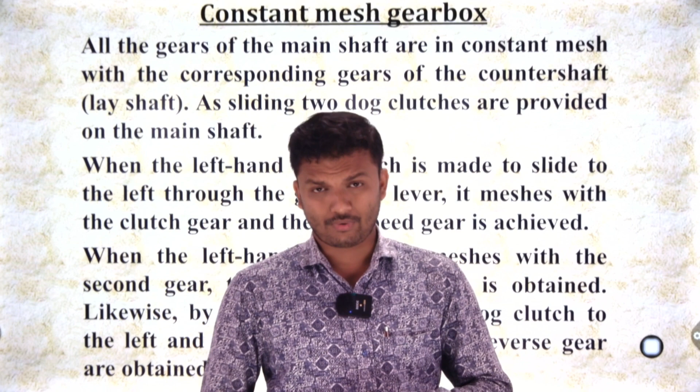Continuing the gearbox system in transmission, the second part of it is gearbox. In the previous class, I already discussed the types of gearbox. The first type of gearbox is sliding mesh gearbox. Today we are going to discuss the constant mesh gearbox.

The constant mesh gearbox means what the name suggests, constant. Previously we studied about sliding, where the gears just slide over each other. They get locked, counter shaft to transmission shaft, and for that purpose torque is transmitted and controlled. But here the word constant means there is no change in the locking of the gear. They are already fixed over each other.

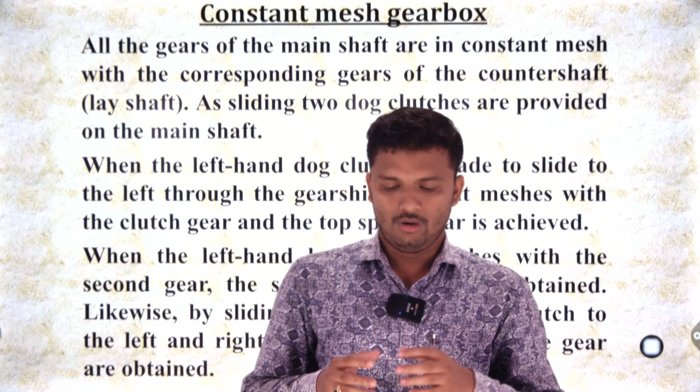All the gears of the main shaft are constant in mesh, as I already discussed, with the corresponding gears of the counter shaft, also known as lay shaft. The transmission main shaft, or the counter shaft, is otherwise known as the lay shaft.

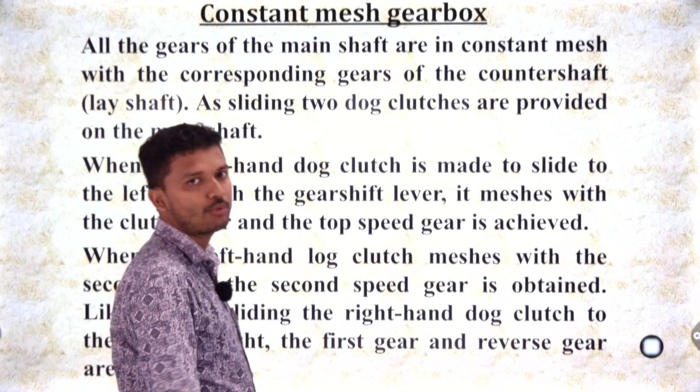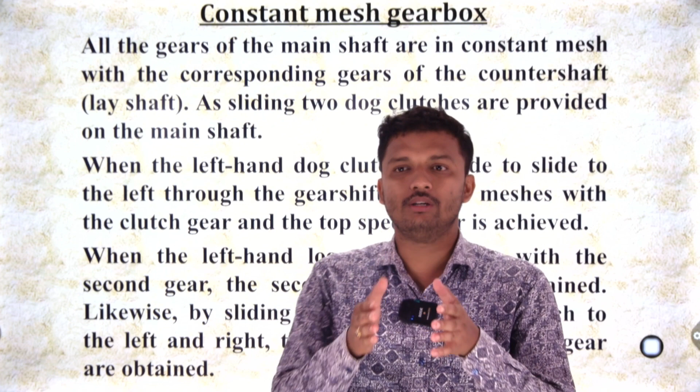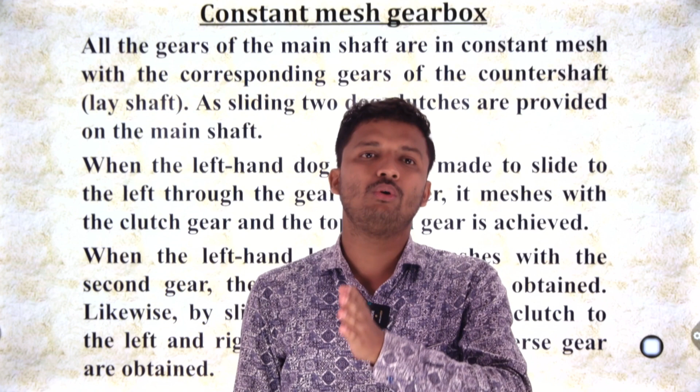As in sliding, two dog clutches are provided on the main shaft. This is a very important term, and the difference between this constant mesh gearbox and the sliding mesh gearbox is that there are two sliding dog clutches. There is an arrangement between the gears known as dog clutches. They slide and connect with the gear arrangement, and accordingly the torque is transmitted. The gear itself doesn't slide over each other, but the dog clutch slides on the transmission shaft, connecting accordingly so that we get the torque by means of the gear arrangement.

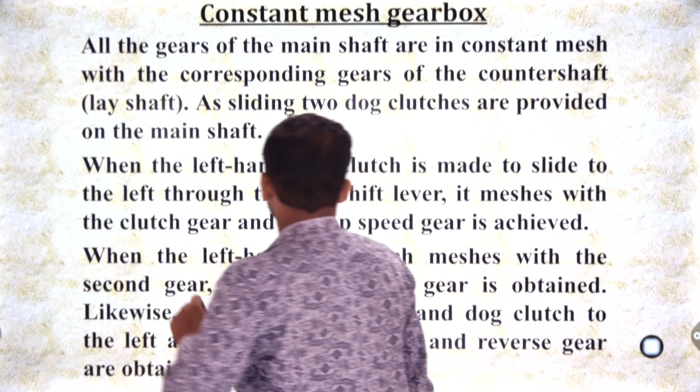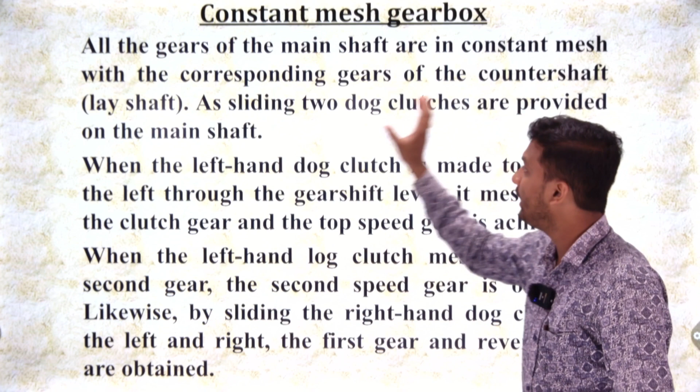As the two dog clutches slide over each other on the main shaft or transmission shaft, that's why it is known as sliding two dog clutches. They are provided on the main transmission shaft, not on the counter shaft or the lay shaft.

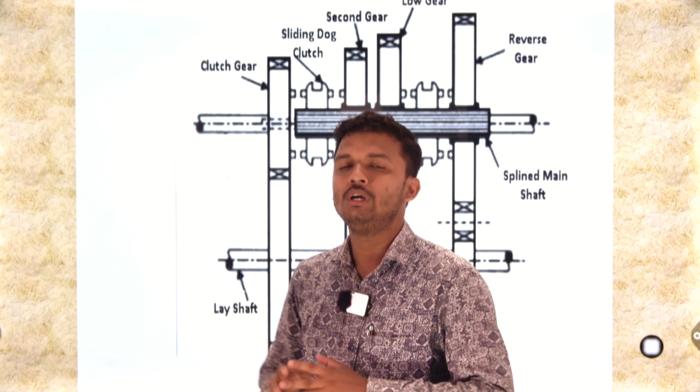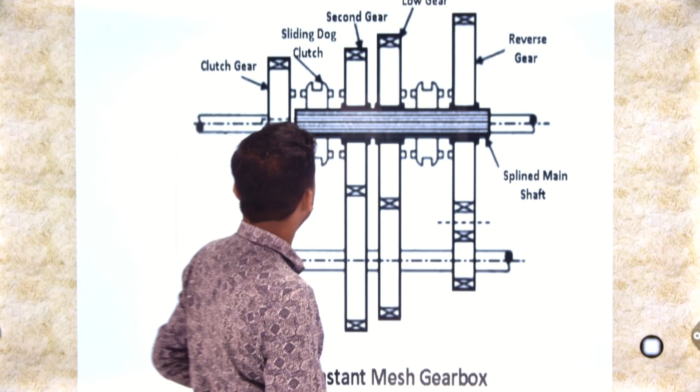So what's happened here is that when the left hand sliding dog clutch is made to slide to the left by means of the gear shift lever, suppose this is the right side and this is the left side, when the left sliding dog clutch slides towards the left side of the gearbox arrangement.

At that time it connects with the clutch gear, and the top speed gear is achieved. These four projection parts will be connected and locked with each other. Then the torque from the clutch shaft or input shaft or driving shaft is transmitted through this dog clutch because it is engaged, and the top speed gear is achieved. The torque is transmitted through the output clutch or output shaft or driven shaft.

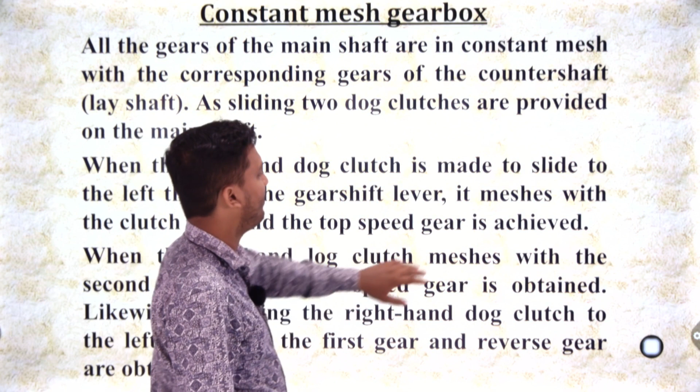Next, when the left hand dog clutch meshes with the second gear, the second speed gear is obtained. Here second gear is marked, this is the second gear arrangement. So when it moves to the right hand side, the left hand clutch gear moves to the right hand side and meshes with the second gear. In second gear, torque reduces and speed increases.

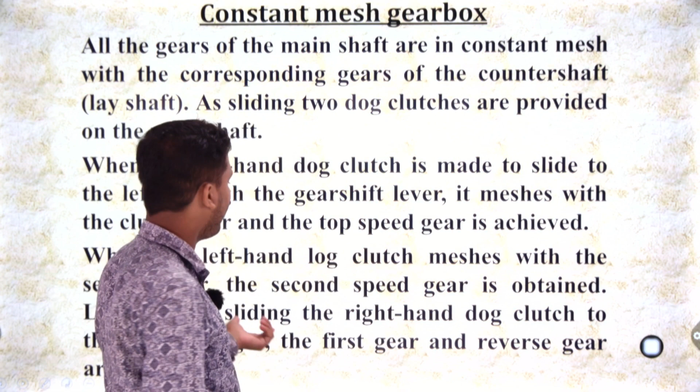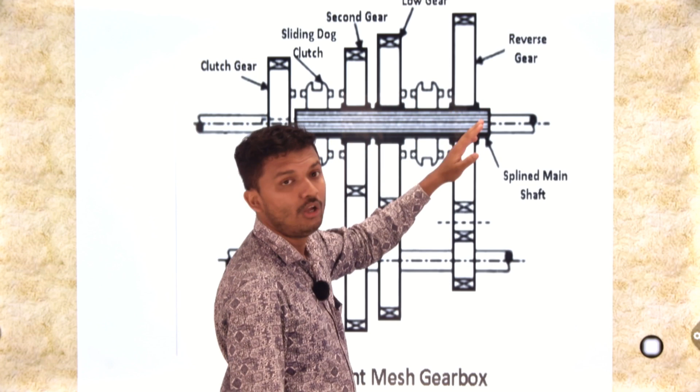Next, at last, likewise by sliding the right hand dog clutch to the left and right, the first gear and the reverse gear are obtained. So the function is similar to that of the left clutch. In the right dog clutch, if you move it towards the left, it engages or meshes with the first gear, or the low gear. Then if you move the right hand sliding dog clutch to the right hand side of the gearbox, it meshes with the reverse gear, and the reverse gear is obtained.

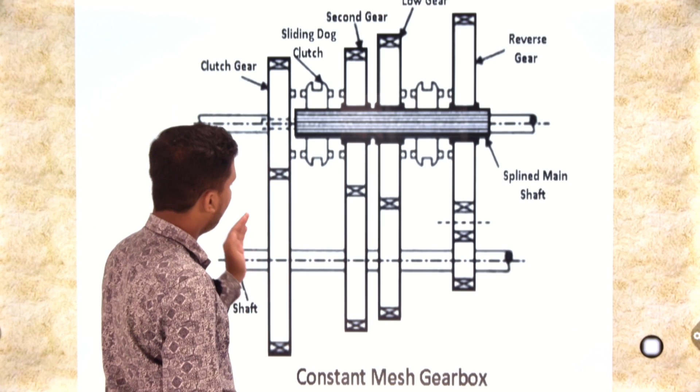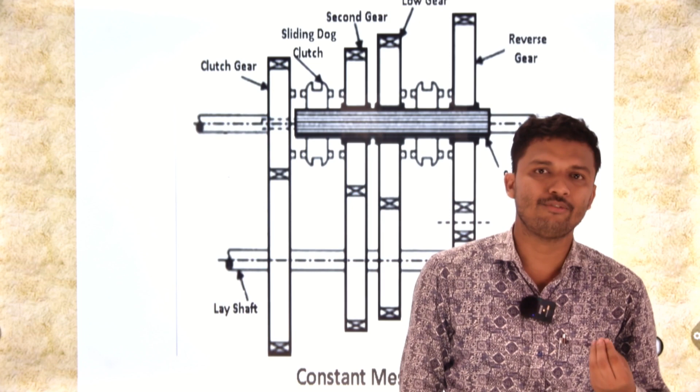So the overall function of this clutch and gear system is that, if you look at this diagram, every gear is already fixed in its own position, meaning they are constant. They do not slide over one another like in a sliding type gearbox. The reverse gear pinion is already fixed or locked, the low gear, that means the first gear, is already fixed, the second gear arrangement is already locked, and the clutch gear or top gear system and the lay shaft or transmission shaft are already fixed. So there is no sliding of any gears or pinions taking place.

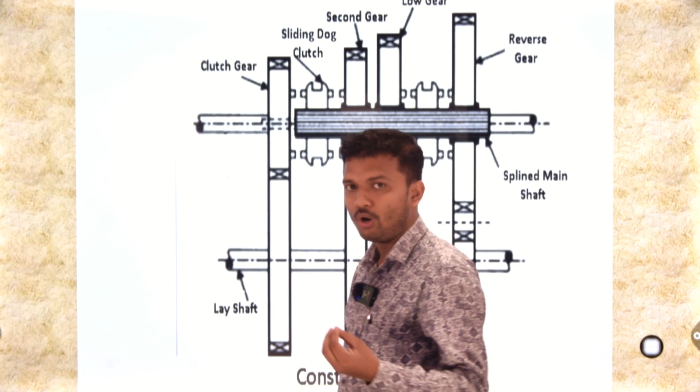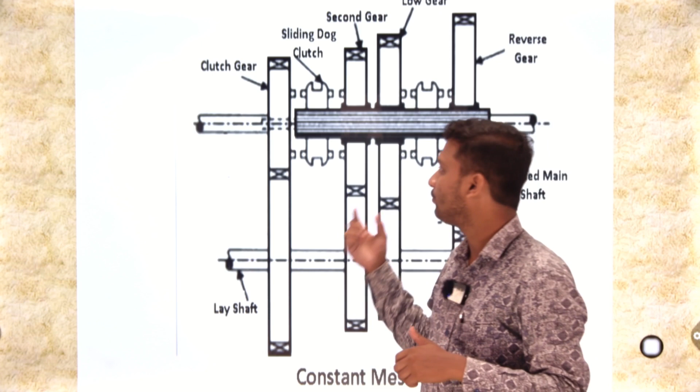So instead of the gears changing their position, dog clutches are introduced in this place. Here the top speed is 3, but in this type of constant mesh gearbox, the top speed can also be 4. Maximum it can get up to 4 speeds, the top speed being the 4th gear.

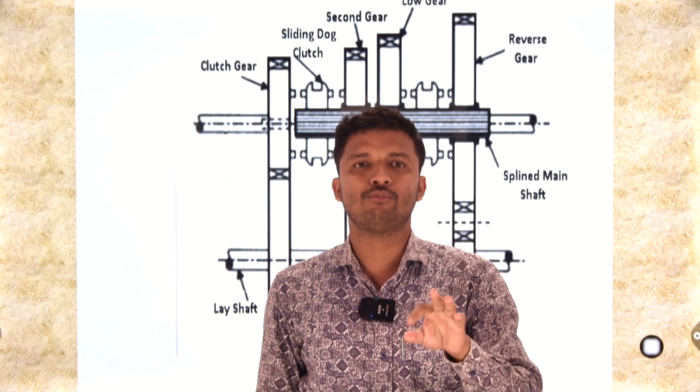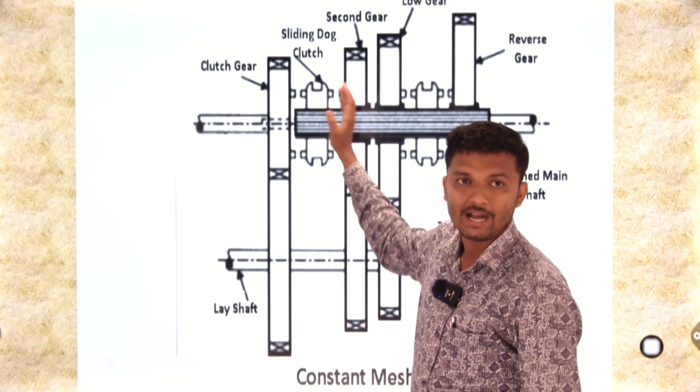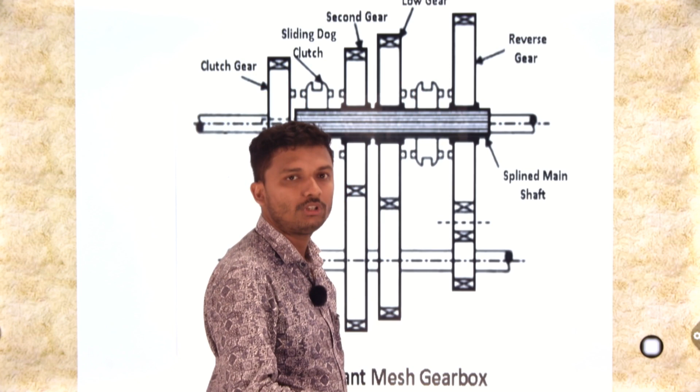Okay, what's happened over here? Again I explain the working principle. First you obtain the low gear, the first gear. For the first gear you just put the gear lever to first. At that time, the right hand side dog clutch will be moved to the left hand side and mesh with the low gear system. Mesh with the low gear system, and at that time the torque is transmitted to the low gear system into the driven shaft. Similarly, when you go for the second gear...

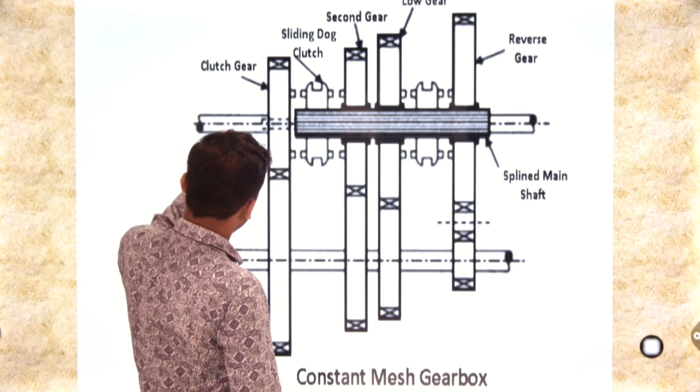When you put the second gear inside it, what happened? The second dog clutch at the left hand side moves to the right hand side, and the projection locks with each other. The second gear is obtained. When the second gear is obtained, the torque is transmitted through the second gear system from the clutch shaft.

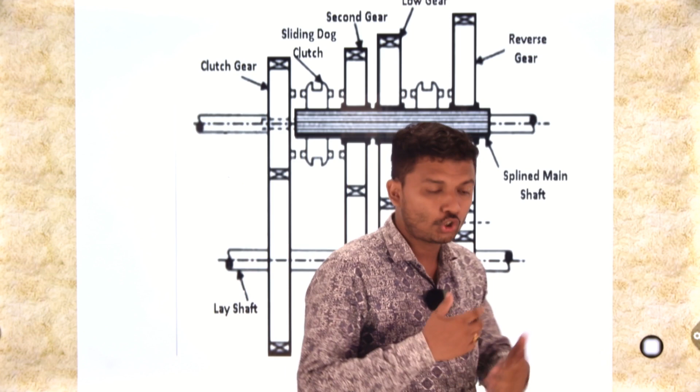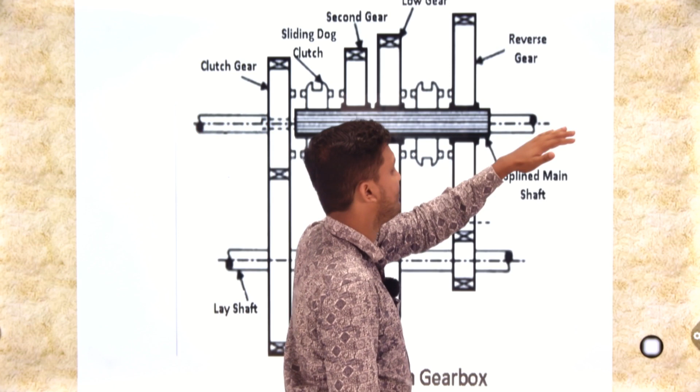Next, we are going to the topmost gear or the top gear. What happened at the top gear? The left hand side dog clutch is engaged or meshes directly to the clutch gear on the left hand side. So the complete torque from the clutch gear is transmitted to the transmission shaft, to the output, throughout the driving axles. So it is the top speed or third speed. In this diagram, the top speed is third gear.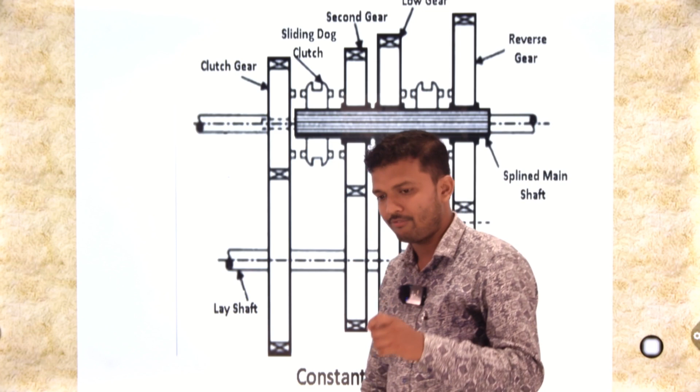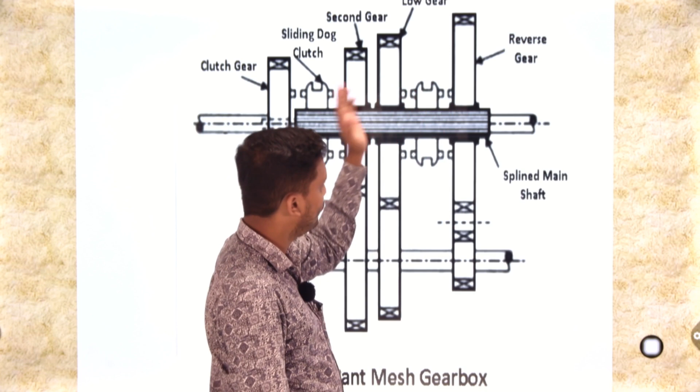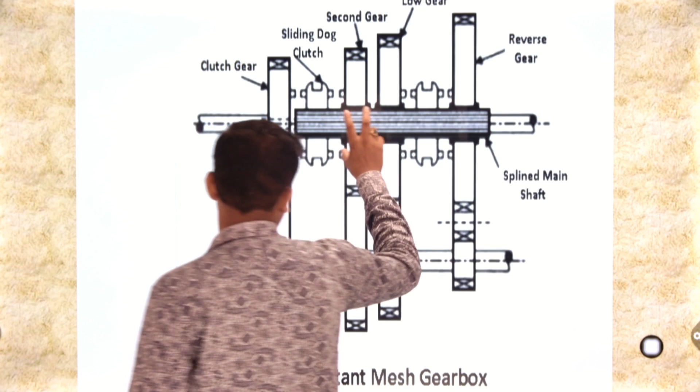Next, finally, the reverse gear. In this reverse gear system, what happened? The splined main shaft - in reverse gear system, if you put the reverse gear by means of a gear lever, the right hand dog clutch moves to the right hand side. When it moves to the right hand side, it gets locked or meshes with the reverse gear. The reverse gear is obtained, and the vehicle will move in the backward direction. So this is the complete working principle of a constant mesh gearbox. As the gear pinions are already locked, they never change their position. That's why it is named the constant mesh gearbox.

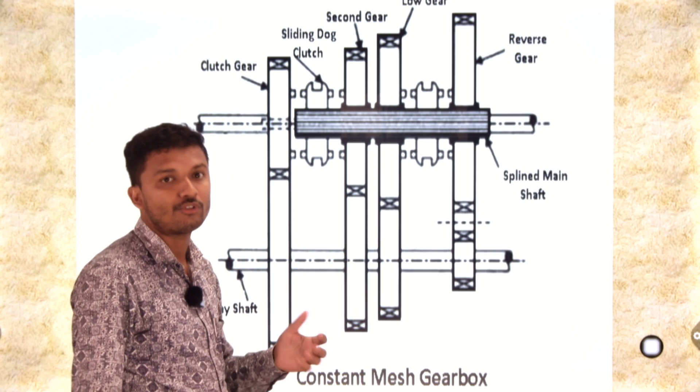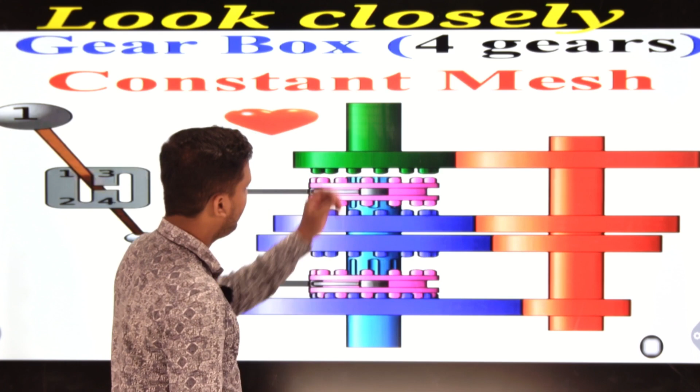So you can understand by means of this animated video. But over here there are 4 gears. Actually, if there is a reverse gear system, then another dog clutch will be here. Here, 1, 2, 3, 4 gears are there. The reverse gear is not able to be defined over here or projected in this video. If there is a reverse gear, then either this 4th gear will be reversed.

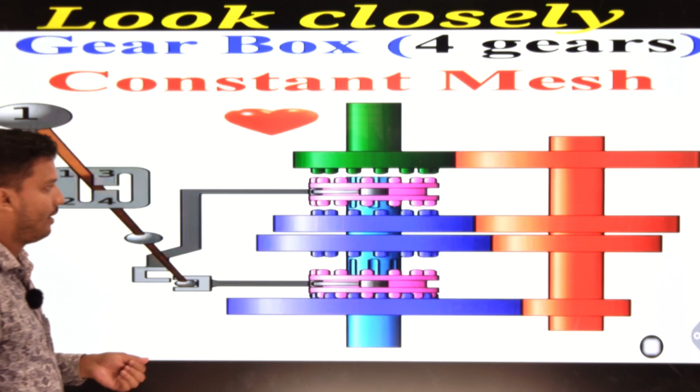So this is the second gear arrangement. The dog only moves, the gears are there in their own position. Third gear, and that is the reverse gear. So the dog clutch - the pink color - are the dog clutches which are moving, whereas the other gears are constant in their position, they are not moving. But in a sliding mesh gearbox, gears are moving with each other. Here, the pink color dog clutches are moving.

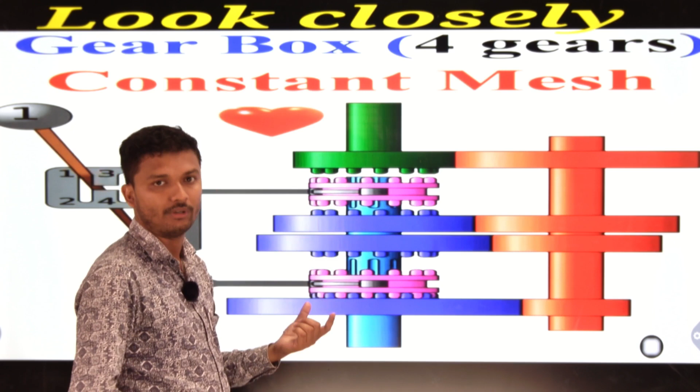Again, go for the video. First gear, this is the second gear. Then this one going to get third gear, and the fourth gear is the reverse gear. Okay.

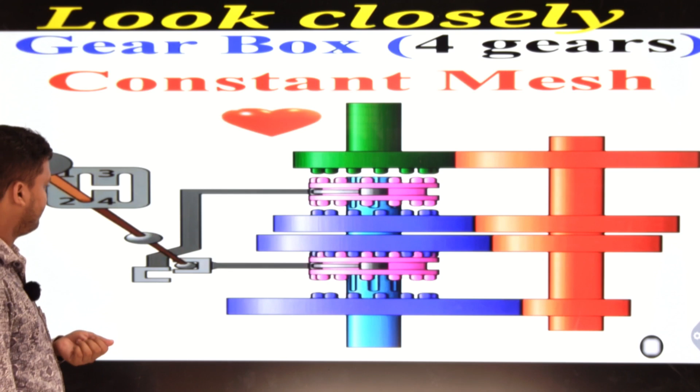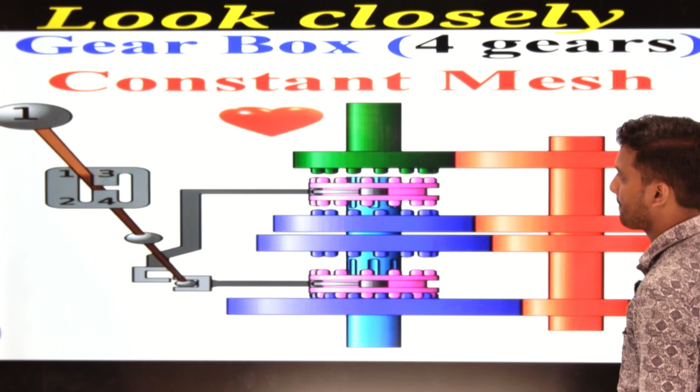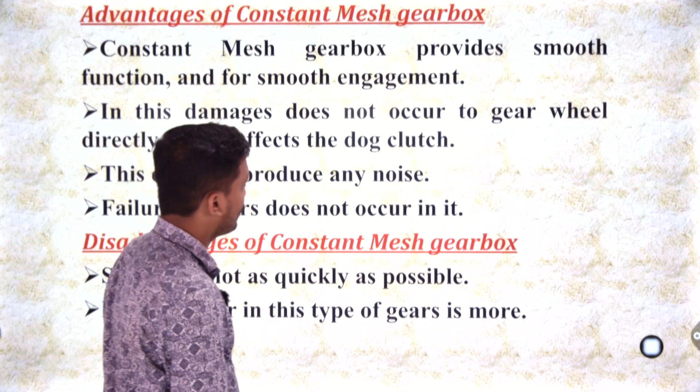What is the advantage of a constant mesh gearbox? The advantage of constant mesh gearbox is that it provides smooth function and smooth engagement.

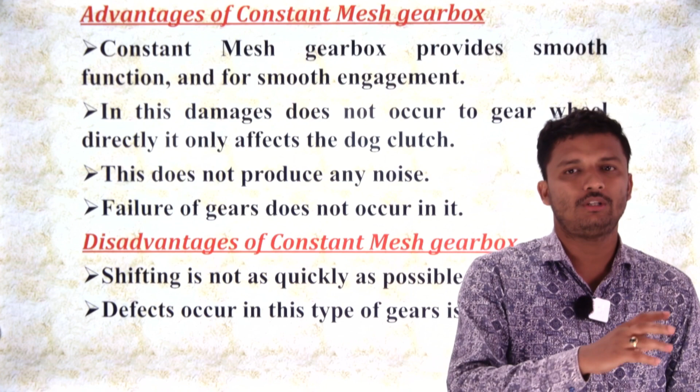As you know, in a sliding mesh gearbox, the pinion or gear system gets slides over each other, the friction increases, and more effort is generated during the time we put in the gear lever for the lock or unlock of the gear system.

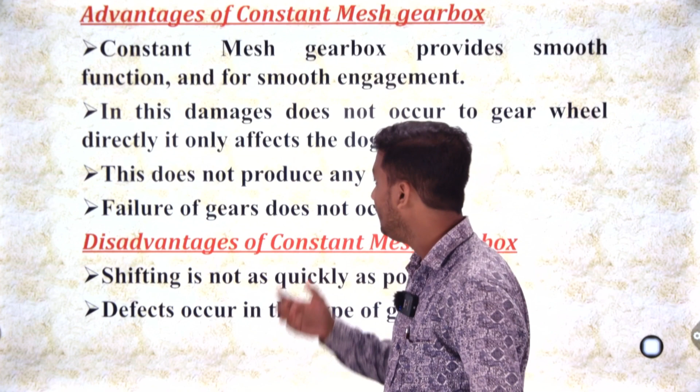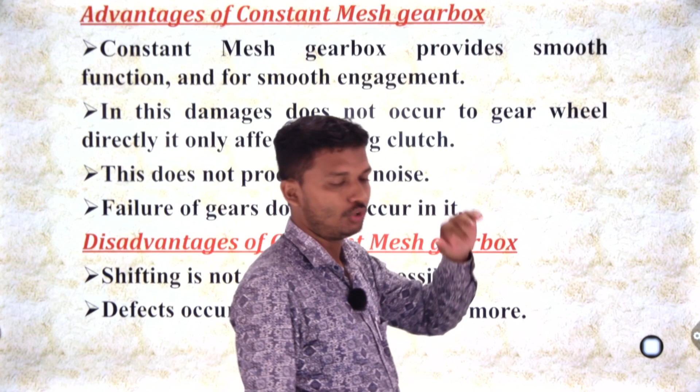But here in constant mesh, by the application of dog clutches, the movement of the gearbox or the movement of the gears, through the dog clutch arrangement, the movement of the complete gear system becomes smooth compared to the sliding type gearbox. So it is a smooth function and smooth engagement type gearbox.

Next, in this type, damage does not occur to the gear wheel directly; it only affects the dog clutch, as the gears do not friction over each other. So the dog clutch has only friction over the gear, and directly the gear pinions are not damaged. In sliding mesh gearbox, the gear pinions directly get damaged as they friction over each other, generating friction, overheating, and damage.

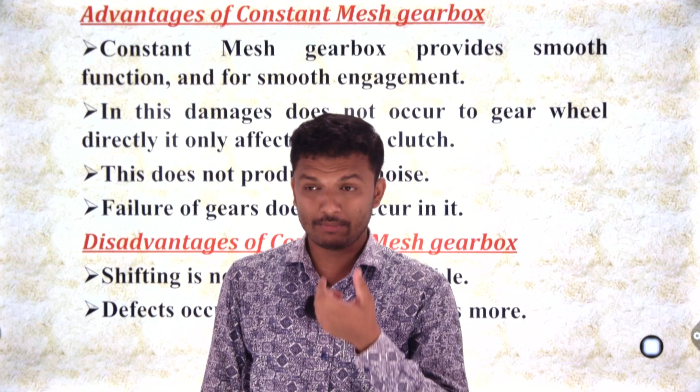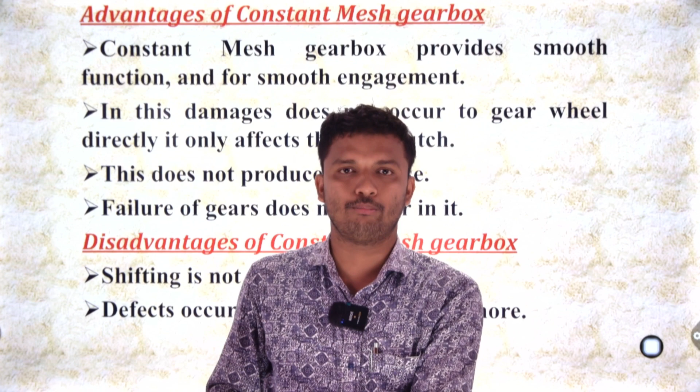In sliding mesh, more effort had to be put in, you would develop more number of efforts and more forces in the gear lever to engage, disengage, and lock the gear. But here, more effort is not required in the gear lever, though it will take certain time compared to sliding mesh gearbox to lock into the torque transmission system. So that's why shifting is not as quick as possible as in sliding mesh.